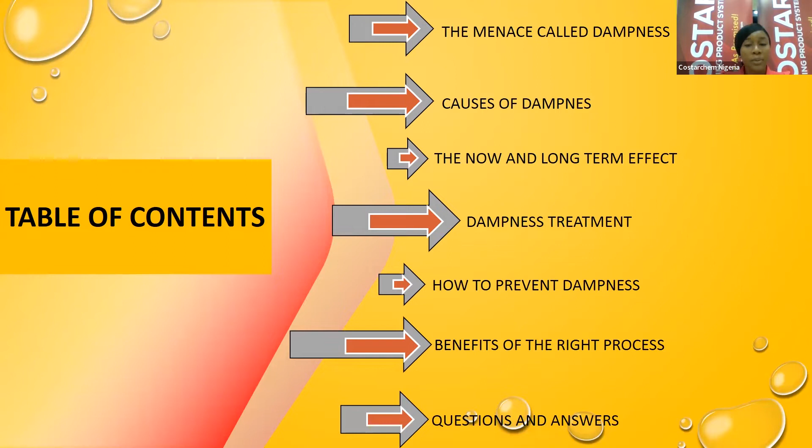The issue of rising damp has been a concern since ancient times. Dampness is the presence of unwanted moisture in the structure of a building as a result of intrusion from outside or condensation from within the structure.

Dampness can occur in different parts of the building, such as the floor, walls, and roof. So what it means is dampness simply means the intrusion of unwanted moisture in the structure. That is the major definition of dampness. So we can see pictures of what dampness looks like.

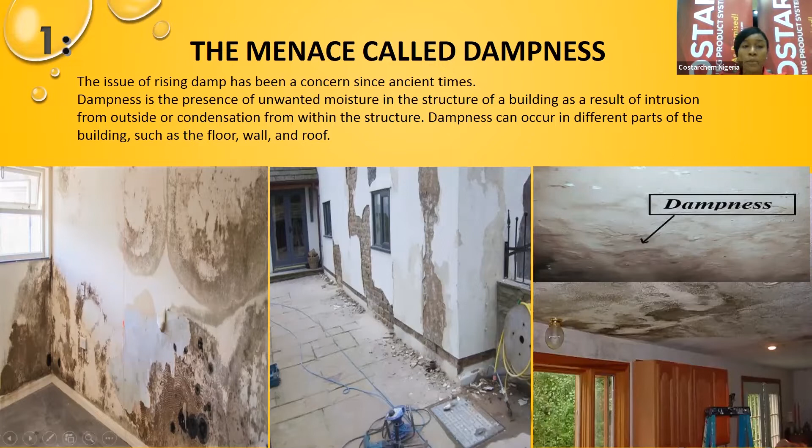These are the different types of dampness. There are other types, but these are the major types: one, rising damp; secondly, condensation damp; and then penetration damp. So we will be looking at these types of dampness individually.

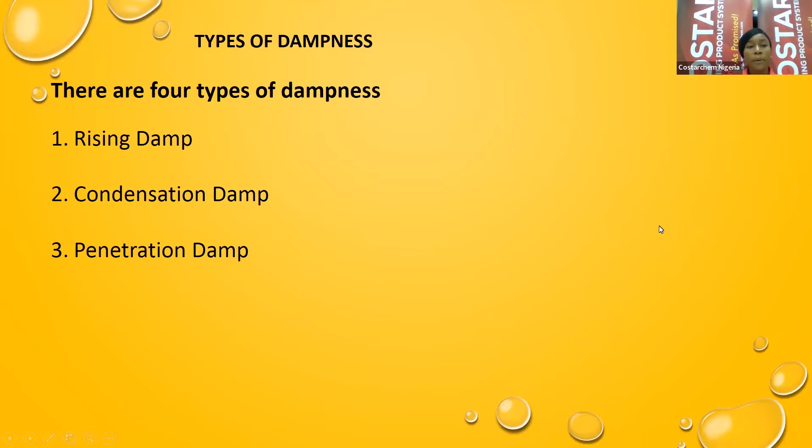Now for rising damp: rising damp in a building may be defined as the upward flow of moisture through a permeable wall structure, the moisture being derived from groundwater. So rising damp originates from your groundwater. It means when your structure is permeable, that is, it allows water to go through it, then you are definitely most likely to have this type of dampness.

So the term is capillarity. You have water from the groundwater, especially for areas that are waterlogged or have a high water table. So you have water moving from the ground onto the foundation and then gradually making its way in an upward movement through the building. That type of dampness can occur due to structural issues of the building.

That is, if your building has a structural defect, meaning it is not properly designed from the design stage, probably some things are not put into consideration, or there's too much load. So when you talk about structural defects, another thing that can cause this type of dampness is omission of a waterproofing admixture and damp-proof course or membrane.

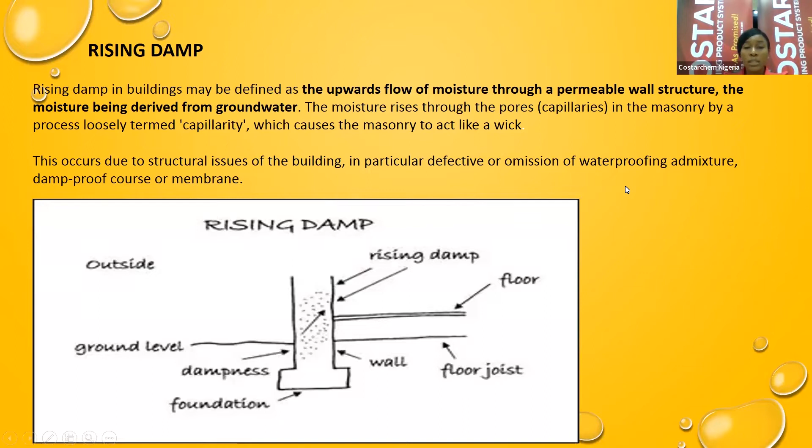You can see three blocks immersed in water, and you can see how the water gradually makes its way up the blocks. From the first block, you can see the level at which it is, then the second block, and now the third block. So when you have issues of rising dampness and you neglect it, it will gradually increase and lead to something worse, and can even cause significant damage to your structure.

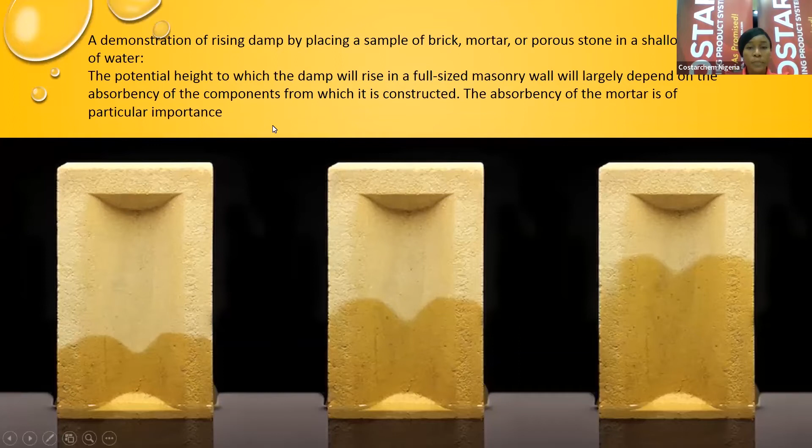So how do you know you have rising damp? These are some of the warning signs you should look out for. When you have damp in the lower part of your walls, you can notice some dampness in the lower part, that is a sign of rising damp. Then gradually this dampness rises up, and you notice patches on the wall, peeling off of paint, and stains on your wall. These are basically some of the signs that come with rising dampness.

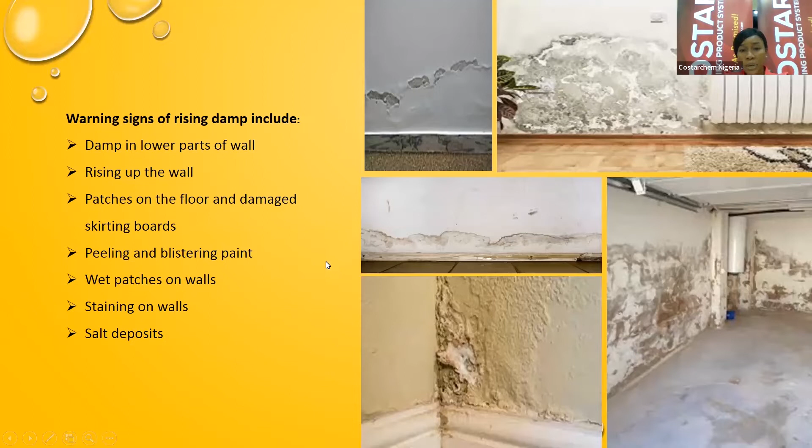Another type of dampness is condensation dampness. Condensation dampness is the most common type of damp. Rising damp is the most severe or most dangerous, but condensation is the most common type of damp we have.

So what can cause condensation? It occurs when humid air comes in contact with a cold surface, such as your walls and windows, or when you have a combination of excess moisture in the air and poor ventilation. This means when you have activities like cooking in your building, it can start from something as simple as steam from your kettle. When there's not enough ventilation, the moisture is not able to escape, so it will gradually condense in your building, and over time it will settle on your wall, making it cold, and eventually causing dampness.

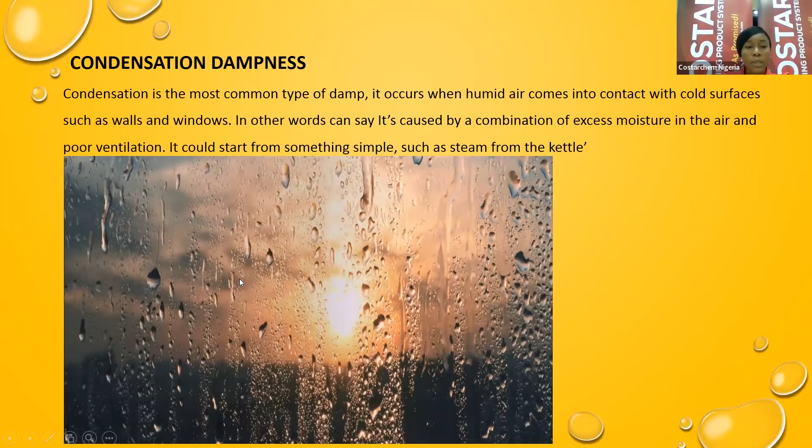You also have growth of mold on the walls or ceiling. Condensation doesn't have a particular location where it starts, unlike rising damp which starts from ground level. It can be on any area of your building - on the roof, the walls, or the floors. Another sign is a musty smell, so your building is usually stuffy because of that.

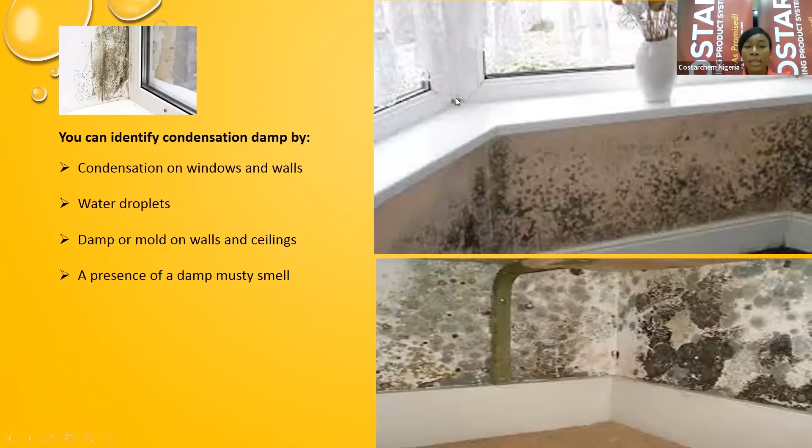That's it for condensation. Thirdly, we have penetration damp, another type of dampness. It's also called lateral damp, although sometimes people tend to separate them, but they are more or less the same. Penetration damp is the development of moisture through the walls and roof, or through the underground walls of basements and cellars.

In simpler terms, it's the end result of water successfully penetrating from the outside of the building into your property. Penetration damp can result due to defects or leakage - for instance, a roof gutter that is not properly treated. When water goes through it and your concrete is permeable, water will go through your roof gutters, causing dampness to the roof areas. Or you might have an open terrace, open roof areas, or a leaking pipe.

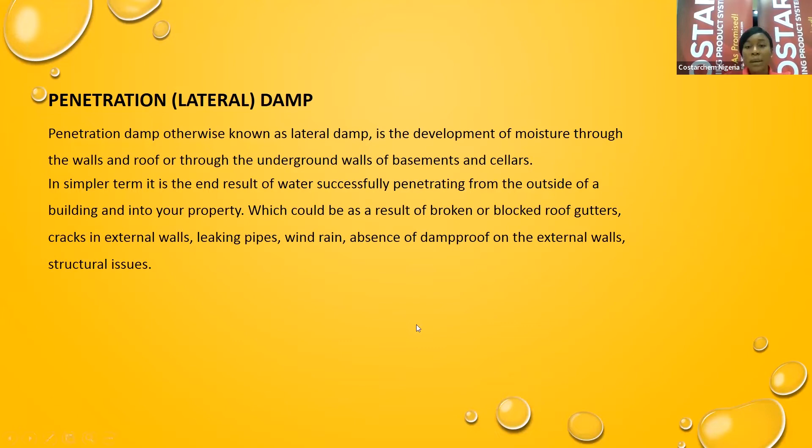We can see pictures of what it looks like. Penetration damp is due to defects or damage of a certain member of the building. It can go through your roof gutter if it's not properly cast, or through wind rain. Or if your external walls are very porous, or you don't have a damp-proof membrane over your external walls.

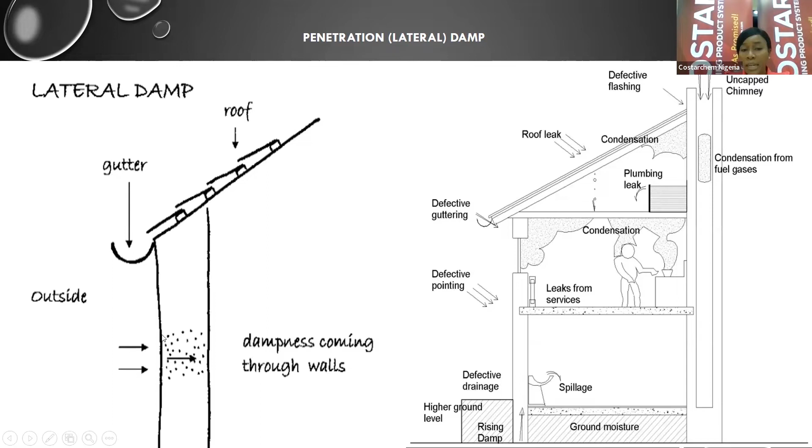It's more or less the same as rising damp - you're going to have patches on the wall, paint peeling off, rotting of boards, mold growth, and moldy smells. One thing about penetration damp is that it occurs most especially during the raining season, because that's when your building is exposed to rain. So that's what penetration damp is.

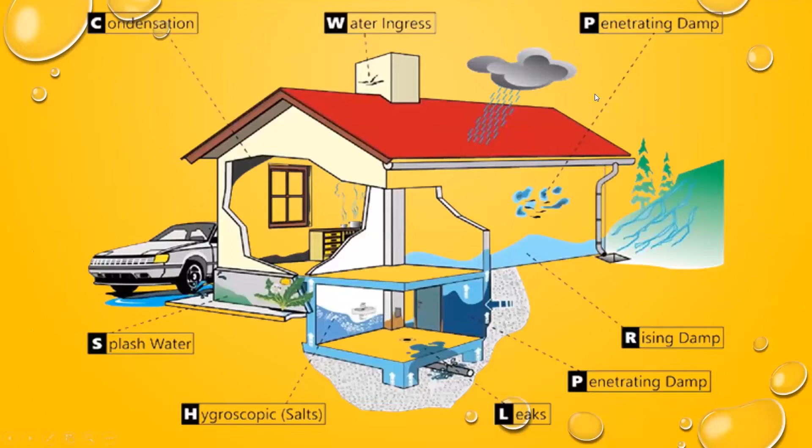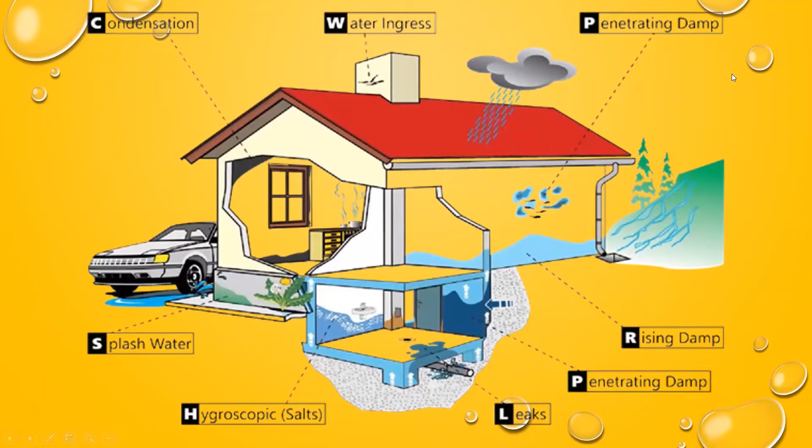We can see an image of how moisture can get into your building. Dampness is something you can never be too careful about. In the image for condensation, you see cooking going on, steam coming out, and the windows are closed, so the steam settles on the wall, leading to damp. Then you see water ingress, probably from cracks, penetration from rainwater, and water from underground. All these activities can lead to dampness.

While we take our time to explain, we can understand the various causes of dampness, and when we start to talk about treatment, we can understand which particular type of dampness we're dealing with. Some people have dampness but don't understand what kind it is, and if you don't understand what kind of dampness it is, you won't know the best or most appropriate method to treat it, because different types of dampness require different methods of treatment. So now we're going to be looking at the causes of dampness.

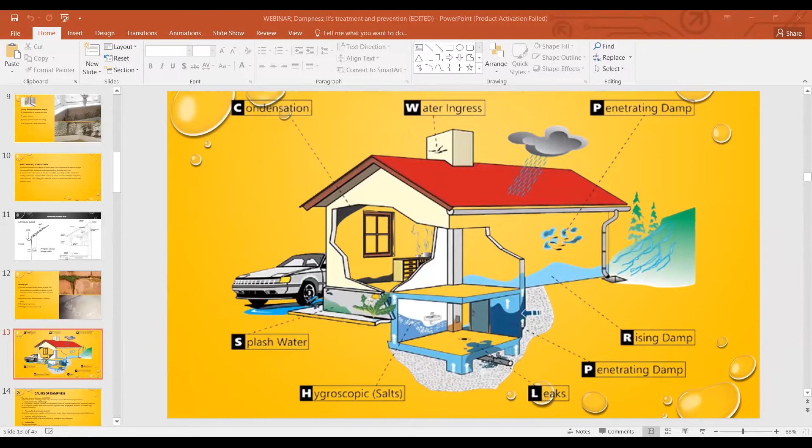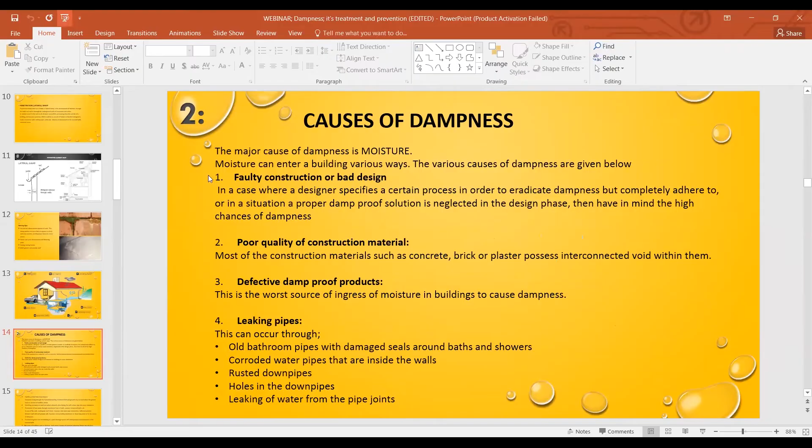Although I already highlighted a few points on the causes of dampness, the major cause of dampness is moisture. Dampness is unwanted moisture in your building. Now, what are those things that can cause this unwanted moisture to come into your building?

One, we have faulty construction or bad design. If you don't do your construction properly, or in the course of your design you don't include a damp course or an appropriate damp proofing method or system, then you should know that over time you are going to have issues with dampness.

Another cause is poor quality of construction materials. When you use materials that are not of good quality, that is another reason that can cause dampness. You also have defective damp-proof products. We have a lot of products out there, so you should be very sure of what you're getting, and be very sure it's a product that is effective.

Another cause of damp is leaking pipes. If you have leakage from your pipes, maybe they pass through your walls and are broken or worn out, that leakage can also cause dampness.

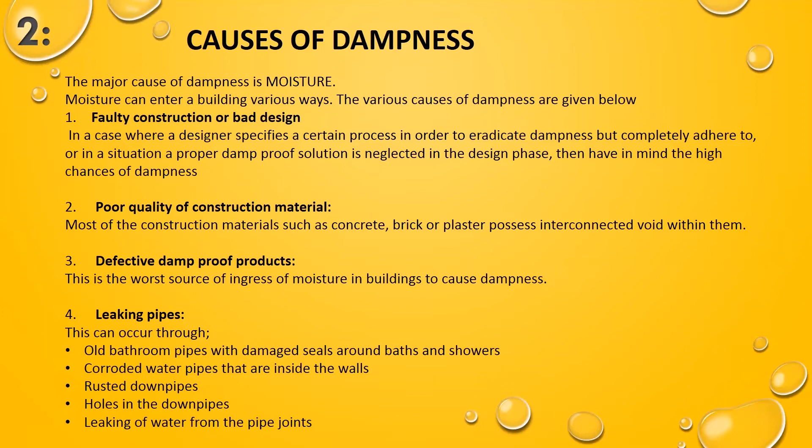Also, we have capillary action. That's when you have groundwater rising up your structure. That's another major cause of dampness.

You also have rainwater and the presence of gutters. If you have a gutter, a drainage system, or a canal very close to your house, then you should know that dampness is something that would also affect the building.

Then your wet areas, like your kitchen and bathrooms, if they are not properly waterproofed or damp-proofed in the course of construction, that again can cause damp.

Then when you have cracks or defects on your building, let's say on your rooftop or your slabs, there's a tendency that water will go through those cracks, which will, at the end of the day, result in dampness.

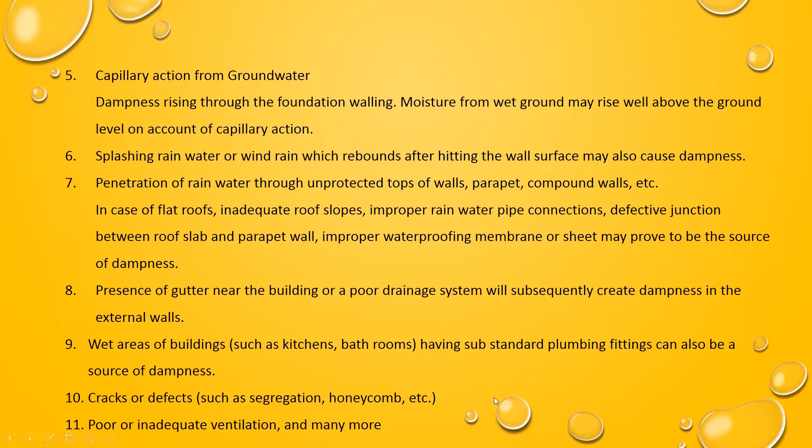Then you also have poor ventilation, like when you don't ventilate your house very well and it's very stuffy, that again can cause dampness. So now this is a picture of areas...

Things that can cause dampness. Yes, we have the crack here, and you have your flat roof that is damaged. So definitely these are the major causes, just shown in a picture. So when you glance at the picture, you understand these are the major things that can cause dampness.

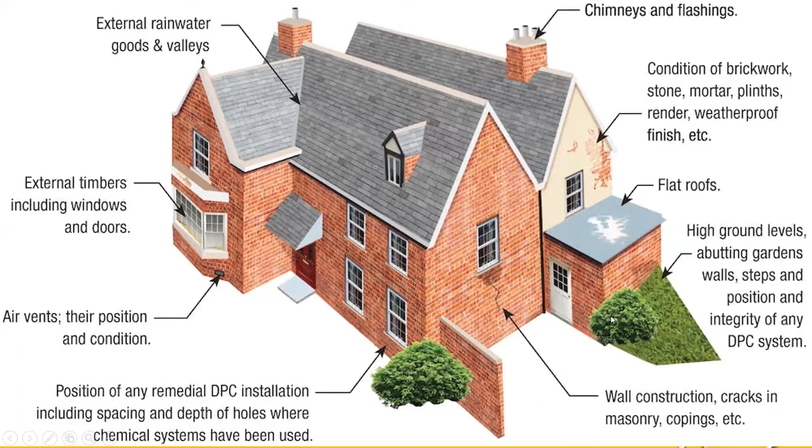What are the effects of dampness? We talked about dampness and its causes. What are the effects? These are the short-term and long-term effects of dampness. If you have dampness in your buildings or structures, there are a lot of things that can go wrong.

Number one, you have bleaching and flaking off of paints or wallpapers. Imagine having your paints looking rough or stained, or your wallpapers damaged. You have deterioration of floor coverings, so your floors can get damaged. You also have your plasters crumbling and peeling off.

You also have efflorescence, which means the gradual disintegration of your bricks, stones, or tiles, because they're constantly exposed to moisture. So with time, there's going to be disintegration.

You have warping or rotting of your timbers. Maybe the doors are made of timber, or the ceilings — gradually they will rot because of dampness.

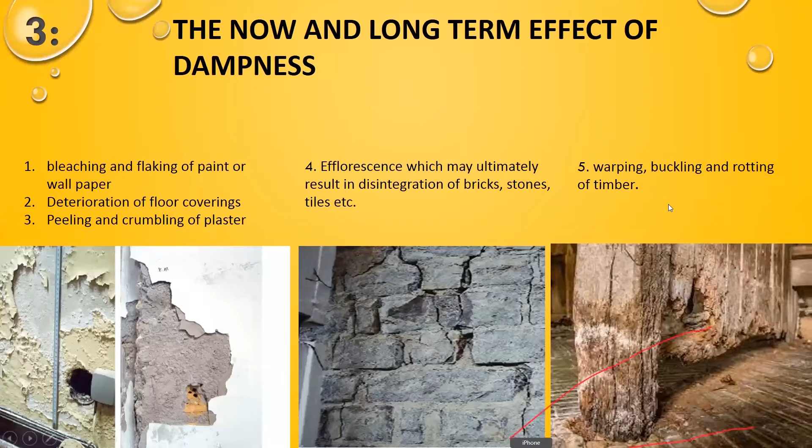Another effect is you have patches on the walls, making the building look very bad. It's like sometimes when you go to some parts of Lagos and look at some buildings — some may be new, but when you look at the appearances, they look very bad because of dampness.

And that's one thing, long-term effects. When you have dampness, over time, your building will look very bad, and you'll be left with having to repaint, having to rescreed, which will cost a whole lot of money. So at the end of the day, you're going to spend a lot of money on maintenance, constantly trying to repair or maintain things because of dampness.

Also, it will reduce the lifespan of your building. So the building you build that probably is supposed to stay 100 years can't even stay up to 50 years. Then you can have buildings collapsing.

Why? Because this water is not just about going into your concrete. When it gets into your concrete, it affects your reinforcement. You have air in your concrete already, so when moisture comes in contact with air and reacts with your reinforcement, it will gradually start to rust. When your reinforcement rusts, at the end of the day you can have collapse, you can have severe damage of your building, which is very, very bad.

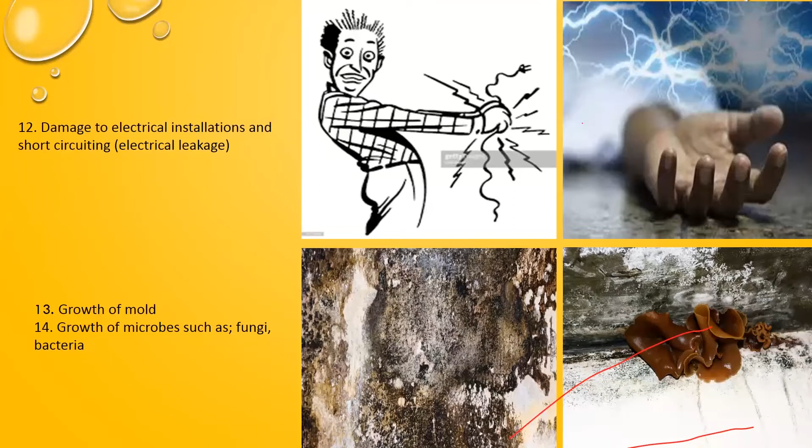So you have growth of mold, growth of microorganisms like fungi, like bacteria. You have it in your space. And do you know what are the effects of having this? This is the effect: you have an unhygienic and health risk.

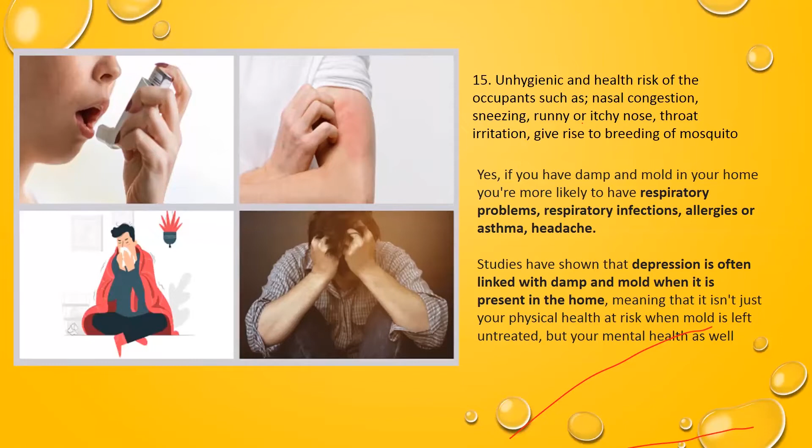So when it comes to dampness, or when it comes to the treatment, you have various methods or techniques available for treating dampness, but this is dependent on the type of dampness you have and also the severity of it. For rising damp, remember I said rising damp is the most dangerous kind of damp you can have, because it's more or less something you don't have control over.

So now it's important to make do of the best method. For rising damp, the process for treating it is, one, injection of Costar Dampmaster 20, that's the first step. But before then, we understand that we have to prepare our surface. When you have rising damp, you already know that the plasters, the paints are very weak, so you have to first and foremost take it off, scrape it off to get the hard block work so you can commence with your treatment.

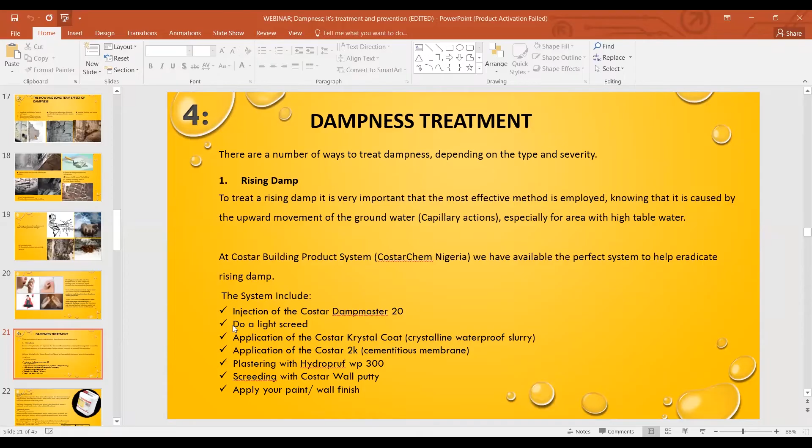That's one. Then secondly, you do a light screed after you've injected this sealant. Then thirdly, you do an application of Costar Krystal Coat. The Costar Krystal Coat is a crystalline waterproof slurry. So what the crystal coat does is it's a penetrator, not a membrane.

Then another thing you would do is now do application of the Costar 2K membrane. The Costar 2K is a cementitious membrane which is water repellent, meaning water from your building or from the surroundings can no longer affect your wall. So when you apply it on your wall, even when you have issues of steam or condensation, it cannot affect your wall. The membrane repels against water.

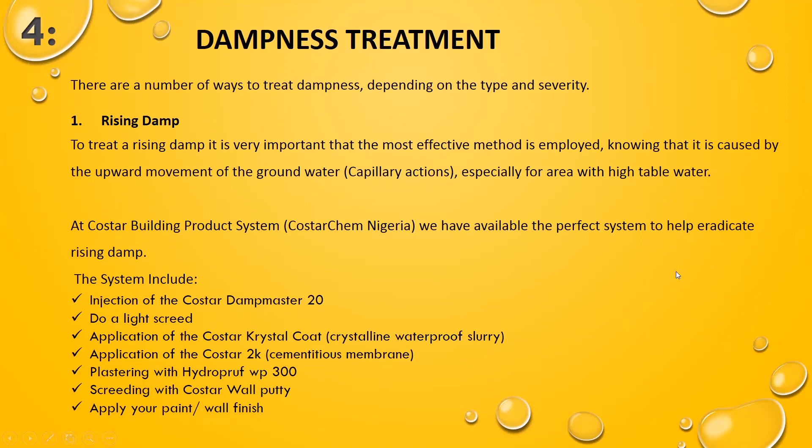For the Costar Dampmaster, as I said, it's a water-based injection silane, which when injected into the mortar course, diffuses within the damp wall to form a damp-proof course.

So now we understand what the Costar Dampmaster is. When you inject it, it goes downward, and then it will diffuse to form the damp-proof course, thereby blocking any groundwater coming up. So that's what it does.

It can be used for different areas, for masonry walls, such as solid bricks, cavity walls, rubbles, infill walls, and so on. So any kind of wall you have, it can be used for.

So what is the application process for the Costar Dampmaster? First and foremost, you have to do a proper surface preparation. The substrate on which the product will be applied has to be properly prepared, so you have to take off existing plasters and paints to get the solid block walls.

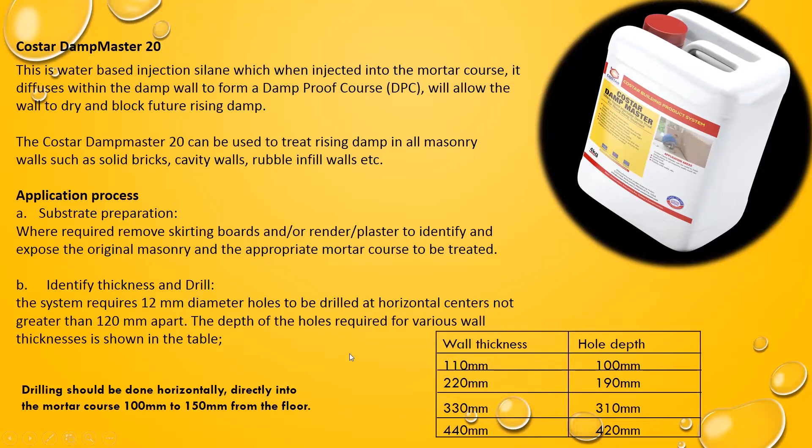Then the next step is to identify thickness. Because you have to drill in the wall, there's a certain depth that should be drilled, dependent on the thickness of your blocks. On this table, you can see the different ranges of thickness and the corresponding depth of the hole to be drilled. Once we identify this, we go ahead and drill our hole.

So after your injection has been completed, the second phase is - remember I said we do a light screed - more to just block those holes that have been drilled, so you don't have it coming out from it. When you do that, you do application of the Costar Krystal Coat.

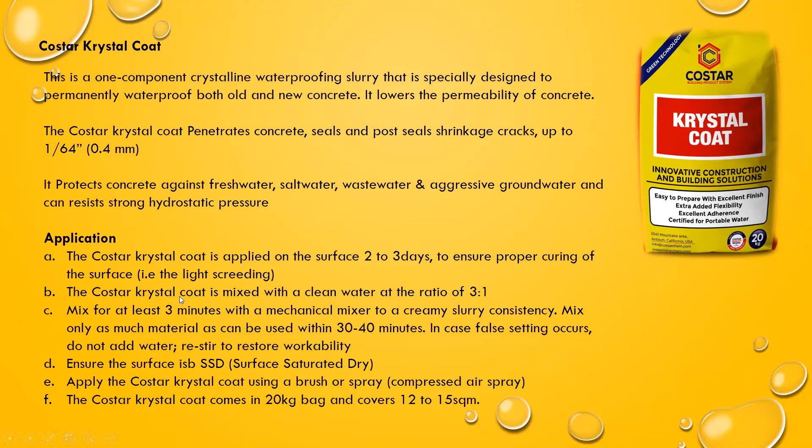Then in the third product we will be looking at for the treatment of dampness, rising damp, is the Costar 2K. Remember I stated the Costar 2K is to prevent water from your surrounding getting to your walls. So now we have to understand or clarify why we have these different products.

First, we have the Damp Master. The Damp Master is to penetrate through your walls towards downward. It will diffuse and form a damp-proof course. That's the purpose of the Damp Master. The crystal coat is to penetrate your wall, react with the water on the wall, and form and fill in the pores of your walls.

So the Costar 2K is to prevent water from your surrounding area from staying on your wall, because if you treat your rising damp and you have water from the surrounding area, it also affects the wall, which can also cause condensation, remember. So that is the purpose of using the Costar 2K.

Then the application is more or less like the crystal coat. You mix it, it comes in 2 packs. You have the liquid and the powder. So you mix these two to get a slurry. When you mix this, you can also apply with the trowel, roller, or brush. Also for the Costar 2K, you have to make the surface SSD, surface saturated dry. That is for the Costar 2K.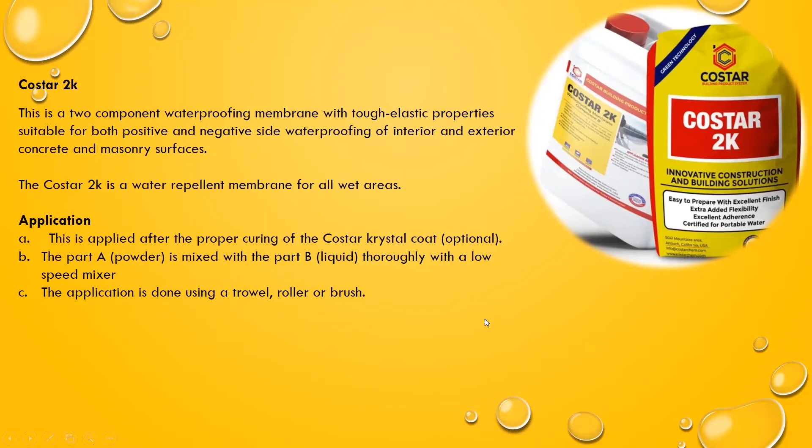Then finally, after the application of Costar 2K, you can do your plastering. For your plastering, you can now plaster adding the Hydropruf WP300. It's an admixture basically to enhance the properties of your mortar. You can just mix it at a very little dosage, 0.5 liter to a bag of cement to do your plastering. So after that, let's look at what the Hydropruf is.

It says a specially formulated liquid anti-crack. So what it means is for your plaster, after plastering, it prevents cracks. It becomes an integral part of your mortar, and it also reduces the transmission of water through the concrete mortar or screed. That's the sole purpose for using the Hydropruf.

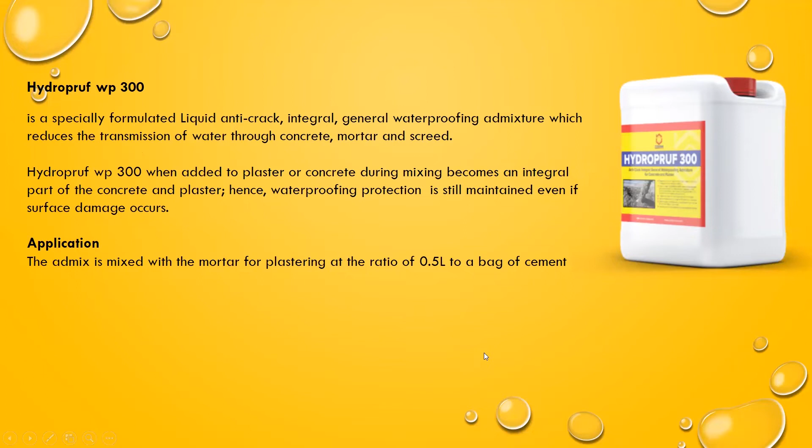Then you can now do your screeding. For screeding, we have the Costar Wall Putty, which comes in either gray or white and any color of your choice. It's a specially developed base coat to provide smooth finish on plastered surface, and hence ideal for paint applications because paint saving can be up to 50%. So when you use the Costar Wall Putty, you can save as much as 50% on the consumption of your paint. That's one of the benefits of using the Costar Wall Putty.

Also, for application, the surface must be clean, dry, dense, rough, and free from probably grease or oil, anything that can hinder or reduce adhesion. Then you mix the product with clean water, stir with a paddle mixer until you achieve a lump-free compound. The stirring can take as much as 3 to 5 minutes. So you can apply the wall putty in a uniform layer on the substrate using the iron trowel. Coverage of this is also 15 square meters for a 20 kg bag.

So I would like to share with us a video so that we can see what the application process looks like, so we understand the processes involved.

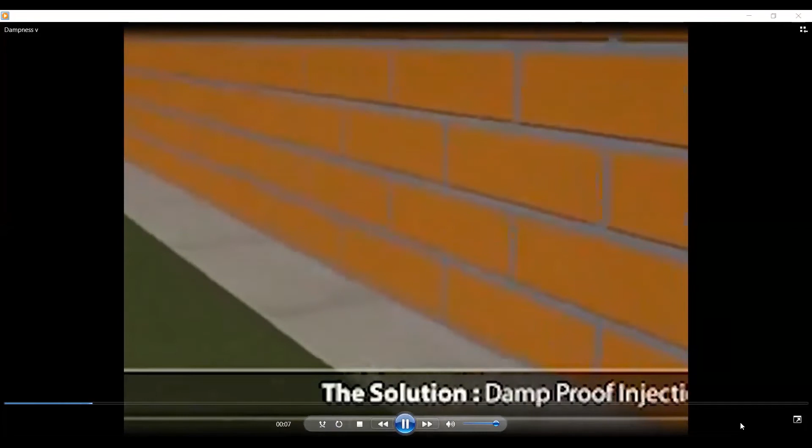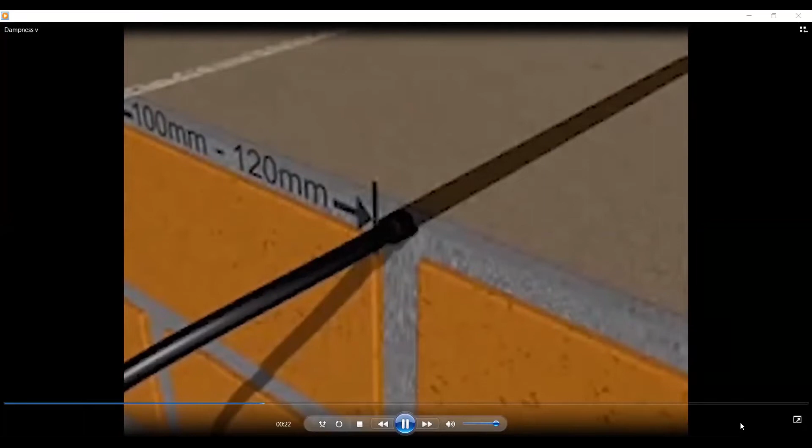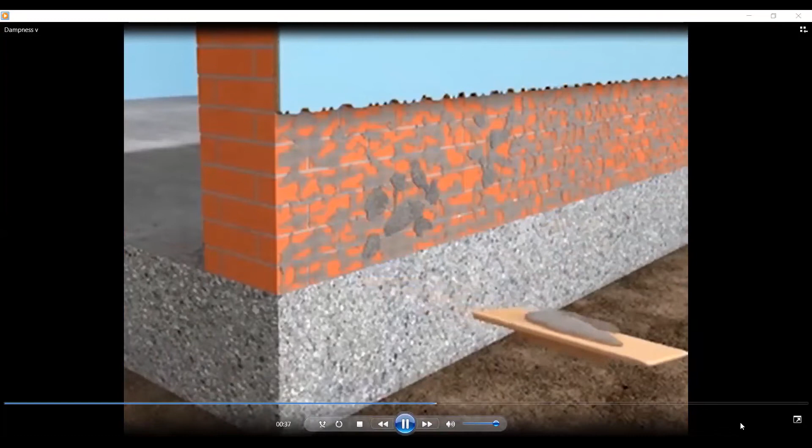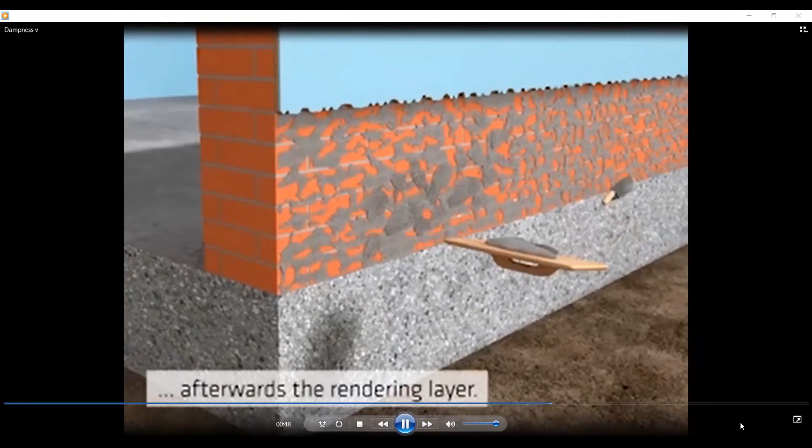So this is you sealing up the surface after the injection. Then you can do your Krystal coat, the Costar 2K. And then you can now do your painting after your scraping. So I want to believe we understand.

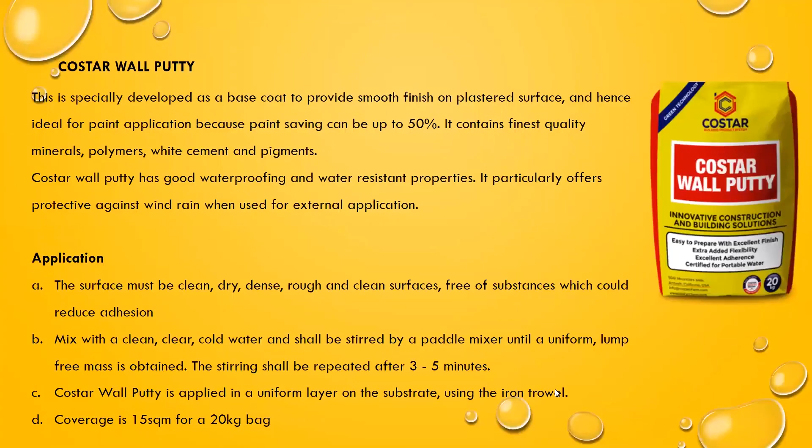Okay, so now secondly, we've looked at treatments for rising damp. We now understand fully what it is like treating rising dampness. So secondly, we are going to be looking at penetration damp.

Now remember that penetration dampness, some of the source or causes of this type of dampness is as a result of maybe leakage. You have a leakage maybe from a pipe, or you have cracks, or you have drainage very close to your building.

So first and foremost, when you realize the kind of damp you have is a penetration damp, the first thing you should do is repair. So if it's like a broken pipe, for instance, you have to trace the pipe and repair it first and foremost. You repair whatever is the root cause of the dampness.

So after repair, then you can apply the Costar Repel SP on the external walls. So with that, your penetration damp is taken care of.

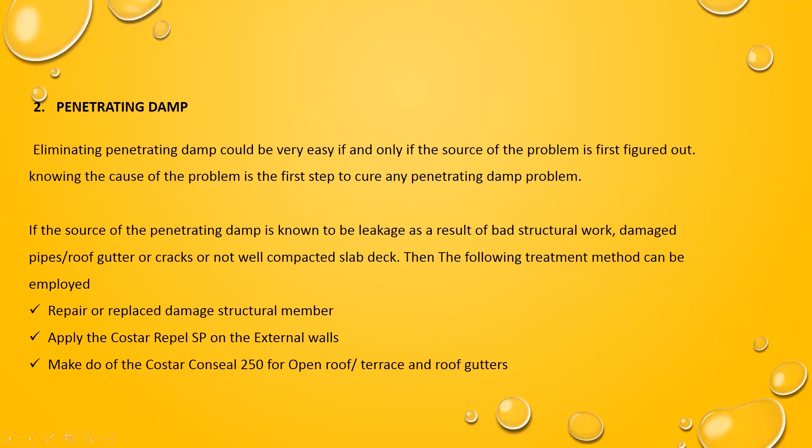Then there's also the Costar Conseal 250. That's for cases of open roof, terrace, or roof gutters. So now we are going to be looking at this product to understand.

So now, the Costar Repel SP. So what does it do? This protects the surface against rainwater penetration without changing the aesthetic appearance of the substrate.

So it is solvent-free and water-repelling. It is suitable for use on all types of masonry, including concrete, bricks, stone surface, and both absorbent and dry, to ensure an effective protective layer against penetration of rainwater. It can be exposed to ultraviolet light.

So another major cause of penetration, aside from having damage, is rainwater. Most of us know it. So water is something we don't have control over, so it's very important we prepare our external walls. We apply this to prevent water from penetrating.

So now, how do we apply this? The application process is, first, surface should be sound, clean, free from dust, oil, grease, and curing compound. It is very important that proper surface preparation is done whenever we want to do any application of any product. Surface preparation is very important.

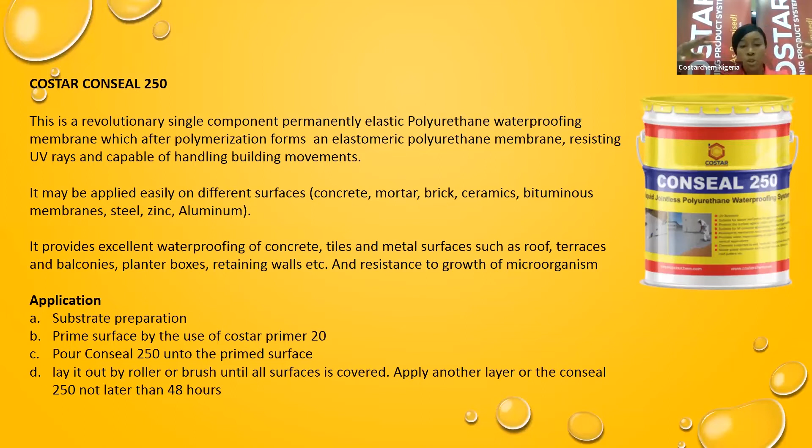So you can do this application by using a roller or a brush until you cover all the surfaces. Note, before you do your second layer, you ensure to give a space of 48 hours, and it should be in opposite direction. So if you've done your first layer probably from the right to the left, the second layer would be from the left to the right. This is just to seal up the membrane.

Okay, so then thirdly, we're going to be looking at condensation dampness, how to treat condensation dampness.

Now condensation dampness, the causes of it, as we stated, is when you have issues like steam from cooking at home, inadequate ventilation, or a stuffy environment.

So these are some of the things we can do. Condensation damp, as I stated, is most common, but the treatment is something very simple. So these are some of the things we should do to prevent this kind of damp: first and foremost, close the kitchen and bathroom doors while in use.

So when you're probably cooking or when you're in the restroom, ensure to close the door. That's the doors going into your main buildings, like going to the sitting rooms, but you can of course leave the kitchen door that leads outside open.

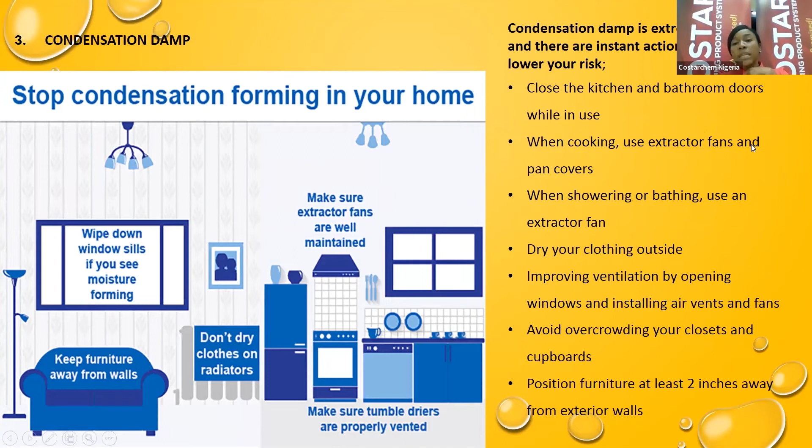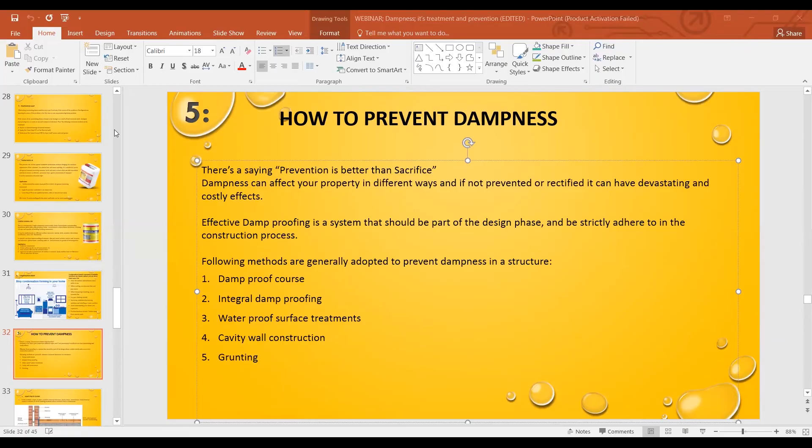And you can see this is a method, a layer of water repellent material, which can be bitumen, plastic sheets, cementitious, metal sheets, or stones. It is inserted at all the points where building moisture entry is anticipated.

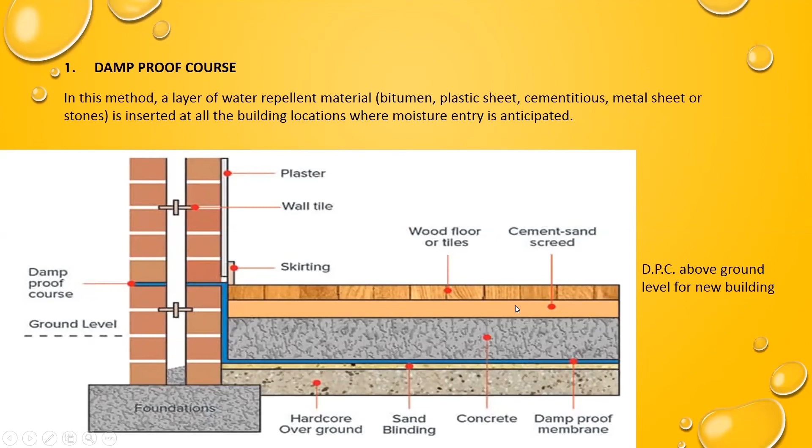So for the Costar products, we have Costar Pro Shield. This is a polymer modified bituminous waterproofing sheet. It is manufactured from a mixture of bitumen and selected polymers blended together to obtain good waterproofing properties, used on basements, retaining walls, foundation walls, and all that.

So for you to prevent dampness from the onset, you make use of the damp-proof course, which includes the Costar Pro Shield, that's one. So how do we apply this?

First and foremost, adequate and detailed surface preparation is essential for durability of the product after installation. Yes, you have to prepare your surface. Not that where you have reinforcement, you just place it on it - it will definitely puncture it, and then water will go through those punctured areas. So you have to prepare your surface and ensure it is properly ready for the sheet.

Then you install all membrane plies from low points or drain, so that the flow of water is over or parallel to the ply. So when you want to apply, you apply based on where you have your flow of water - you don't apply perpendicular to the flow of water. It should be parallel to your water flow, so that you don't have water going through the sides to the other end.

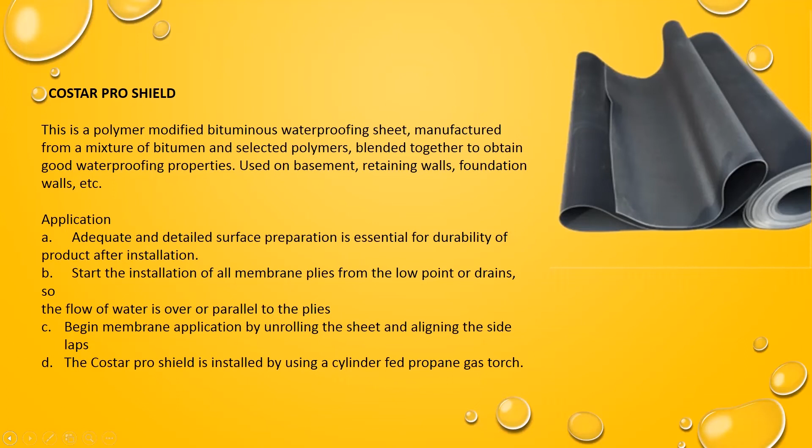Then another thing we have to put into consideration when doing our construction is the integral damp proof. So now we have our damp proof course, but it is very important that we also make our concrete itself watertight, because if your concrete is watertight, no matter the level of water you have, the water would not go through your concrete. I feel this is the most important form of preventing dampness - so you make use of an integral waterproofing membrane.

So now if you're doing a below grade structure, it is very important that you make use of the crystalline, that is the hydrophilic waterproofing admixtures.

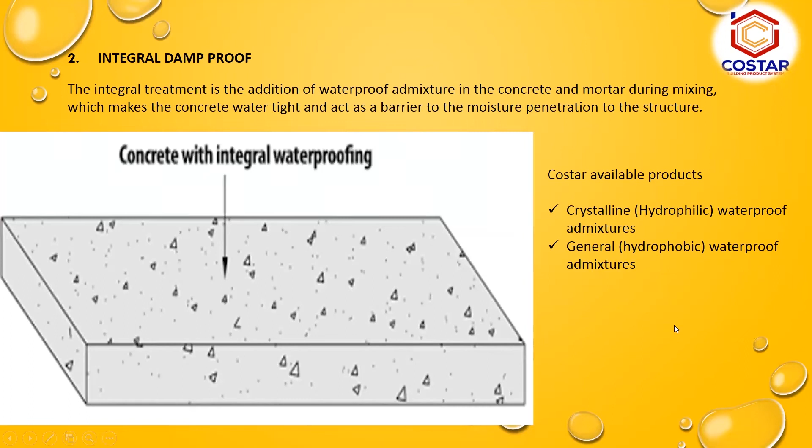But in a case where you are doing an above grade, like maybe you want to cast your roof slab or you want to do your plastering, then you can make use of the general waterproof admixture, that is the hydrophobic. So we have an image of what it looks like to have the waterproofing admixture in.

So for the crystalline, which is the hydrophilic, this admixture, as I stated, is appropriate for your below grade. It permanently makes your concrete watertight. So one beautiful thing about waterproofing admixture, while I say it's most likely the best means of prevention of dampness, is it becomes an integral part of your concrete. So it is part and parcel of it, like two have become one.

So it means that even when a particular part of the concrete is damaged, it doesn't affect the waterproofing, unlike when you have a sheet or a membrane, when you have a puncture, then water can go in through that point and still affect your concrete. So these are the highlighted characteristics of the Krystal 2600.

So now another beautiful thing about our product, the Krystal 2600, is the fourth generation crystalline waterproofing admixture. So what it means is it's not just hydrophilic, it is both hydrophilic and hydrophobic in nature. So that's a beautiful thing about the Krystal 2600. It reacts to water and at the same time repels against water.

Then it permanently waterproofs the concrete. It becomes an integral part of the concrete. It protects your concrete against chemical attack and corrosion of your reinforcing steel.

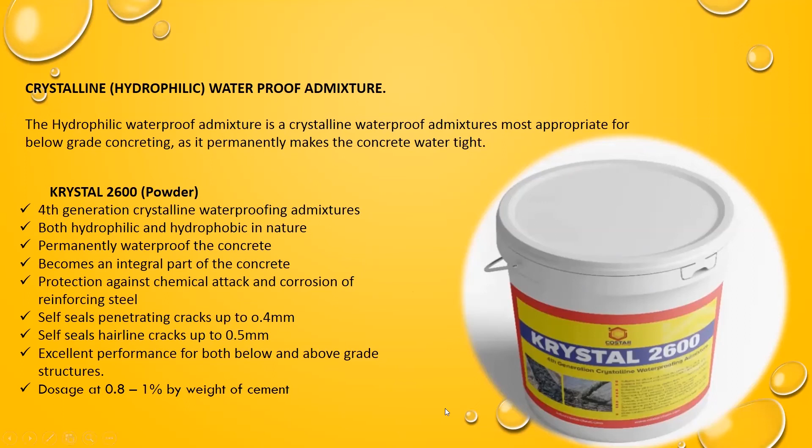So the Krystal 2600, the Crystal 2000 - the Krystal 2600 is a powdered crystalline waterproofing admixture, while the Crystal 2000 is a liquid, because it depends on choice. Most times people will tell you, oh, they prefer to make use of liquid, or I prefer to make use of powder.

So if you want to go for the liquid, we have the Crystal 2000. It's a third generation. So the Crystal 2000 is not a fourth generation, we should know that. It is only the Krystal 2600 that is the fourth generation crystalline waterproofing admixture.

It protects against negative and positive water pressure. So when I say negative and positive, it means both water from the external and water from the internal. So both inside and outside, there's protection against it. It also becomes an integral part of your concrete. You can also use it for your below or above grade. It provides you a watertight concrete.

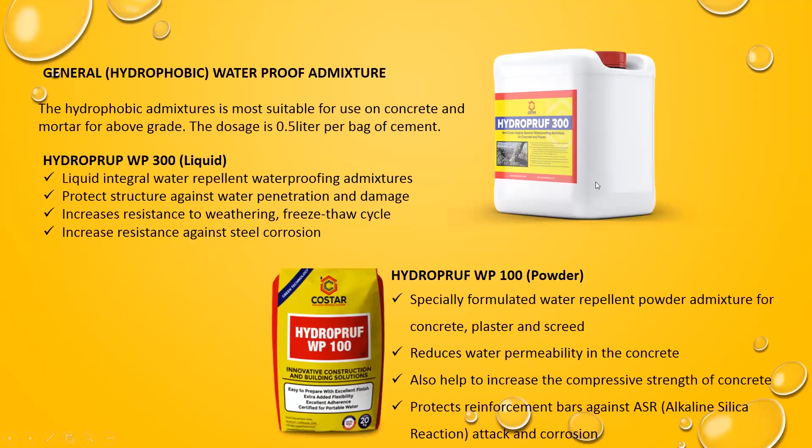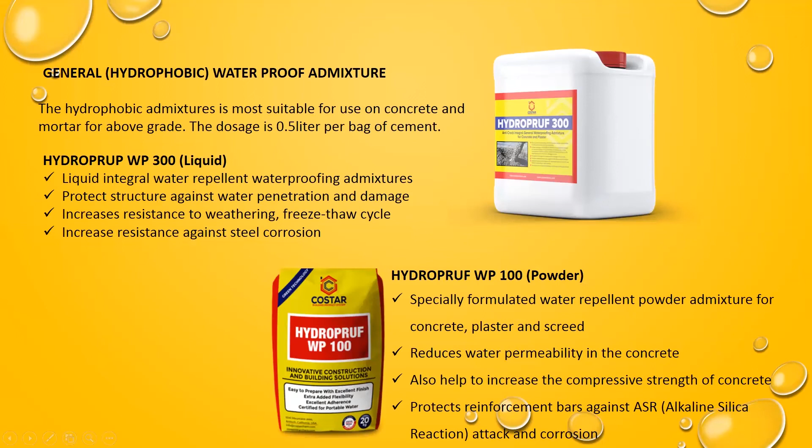Then for the general - this is ideal when you want to do your above grade structures, like when you want to cast your roof slab or terraces, or you want to do your plastering waterproof, which will repel against water. So this is hydrophobic, it is water repellent. It doesn't allow water to stay on it. So it's just like when you have a glass and you pour water on a glass, that's what it makes your concrete. It makes your concrete glass-like.

So part of the benefit of the Hydropruf 300 is it prevents against water penetration and damage, increases resistance to weathering, freeze or thaw cycle.

Yes, so now for cases where you want to prevent penetration damp, while doing your screeding, you can do your screeding or plastering using the general waterproofing admixture. When you make use of the general waterproofing admixture, your screeding can prevent against wind, rain. It doesn't allow water to go through. So it also increases resistance against steel corrosion. So when you don't have water go in through your concrete, definitely you cannot have your reinforcement corrode.

Okay, so the Hydropruf 300 is a liquid, while the Hydropruf WP 100 is the powdered version.

So now we have the third method to prevent dampness. We now understand that to prevent dampness: one, there's the importance of using the damp-proof course. Secondly, we make use of the integral damp-proof method. And thirdly, we make use of waterproof surface treatment.

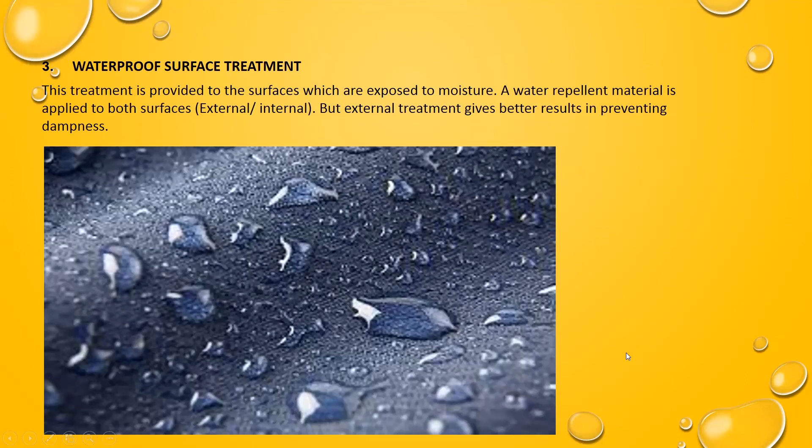So you have the Conseal 300. Conseal 300 is a pure bitumen emulsion with excellent elastic property used for long-lasting waterproofing. It's a single component liquid which dries to form a black flexible coating. So when you want to do a membrane or surface treatment on your building, you can make use of the Conseal 300. You apply it before you do your screeding. After your plastering, you do your Conseal 300, and then you can now do your screeding. With that, you are sure to have prevented any form of dampness, be it penetration or condensation dampness.

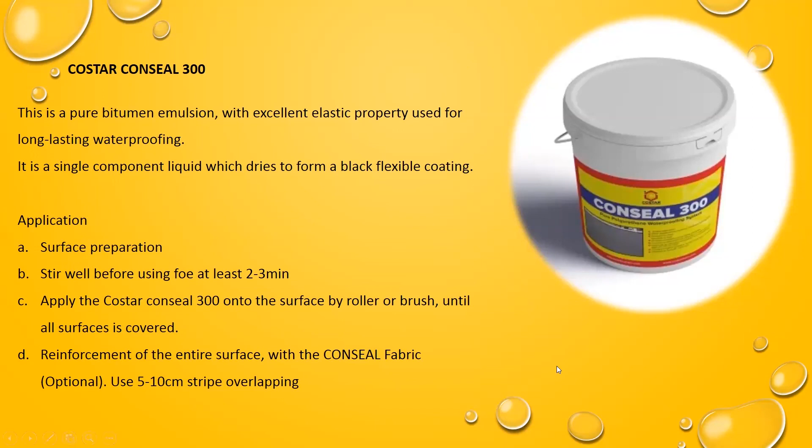So how do we apply this product? First and foremost, surface preparation. Then you stir the product — it comes in a liquid form. So what you need to do is just stir the product, and then you can apply using either a roller or a brush. You can reinforce using Conseal fabric; it is optional. Usually for problem areas, maybe edges, cracks, or defects, you can make use of the fiber and do a second layer on it just to ensure proper application.

So when you have an exposed roof, endeavor to do a proper surface finish, where you can make use of the Conseal 250. And then for your external walls, you can screed with, or do your plastering or screeding with the Hydropruf WP 300, or you can apply the surface treatment, the Conseal 300.

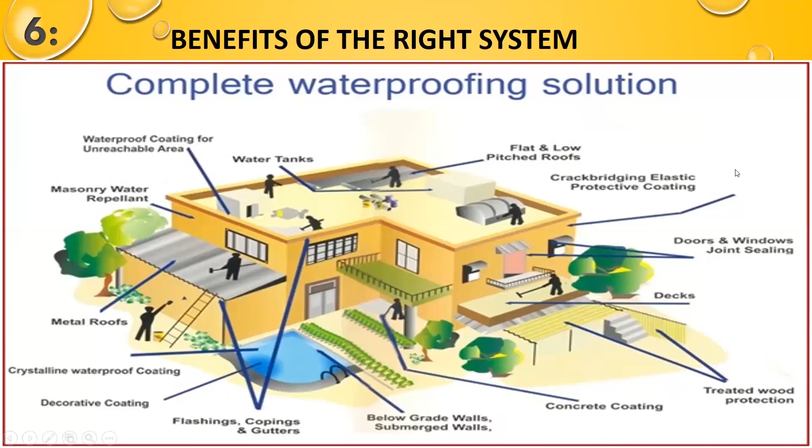So when you do your complete waterproofing system on your building, what are the benefits? You are sure to elongate the lifespan of your building. Yes, when you do the right process, you elongate the lifespan, you increase the property value, because your building would just remain the way it is after many years — it doesn't depreciate. Then you provide a healthy environment for the occupant.

It is very important. In as much as we want to make money, we must also have in mind that the healthiness of the occupants is very important.

Then you reduce drastic costs of maintenance, like having to repair, having to treat dampness. Then you have peace of mind. When you do your structure as an engineer after construction and you stay years without issues of dampness, you have peace of mind. You even get recommendations, you get referrals, because if you build my house for me and I don't have issues, most likely I would call you when I have someone who wants to do the same thing. So it is very important to do the right process.

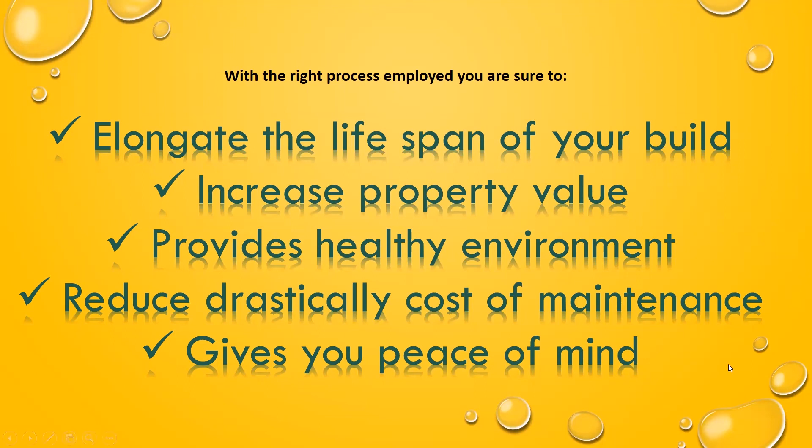Doing the right process does not cost that much. It is not even as expensive as we think it is. It is even more expensive when you have to treat, because a lot of things can go wrong when it comes to treating dampness — it's not as if it's a permanent cure. So it's better to do the right process from the beginning to avoid a lot of things that can go wrong. When we do the right process, everybody's happy at the end of the day. There's no cause for alarm, there's satisfaction and all what have you.